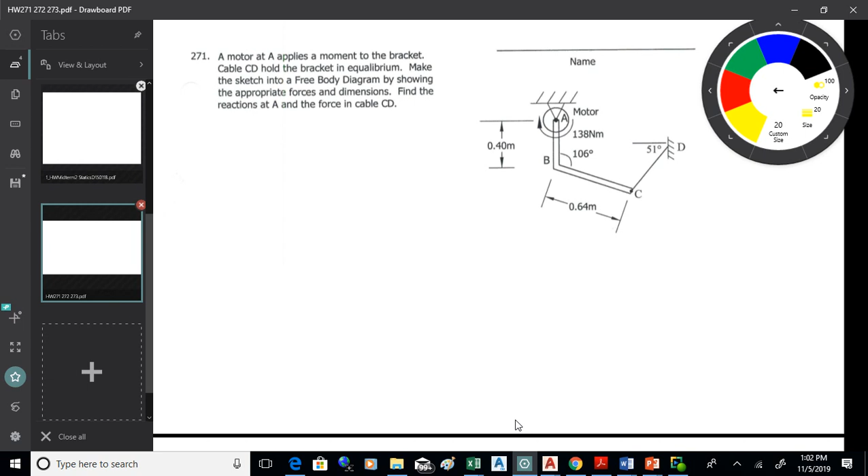Also there's a new version of 271, 2, and 3, if you have the newer book, which I think says 2019. It doesn't look too good, does it? I guess we better get that down.

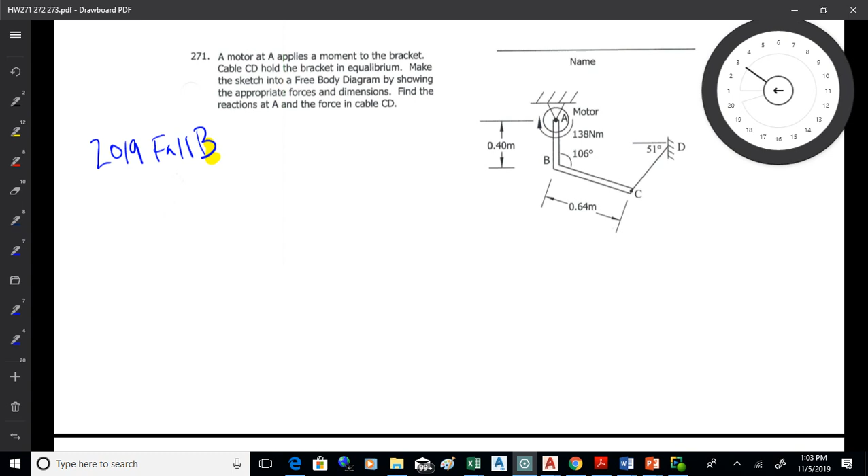All right, so your book should say, I think it's 2019 fall, with a B after it. That has the correct problems in it. If it doesn't, you either need to get a copy here in class, which I handed out, or go on Moodle, where I've got them posted.

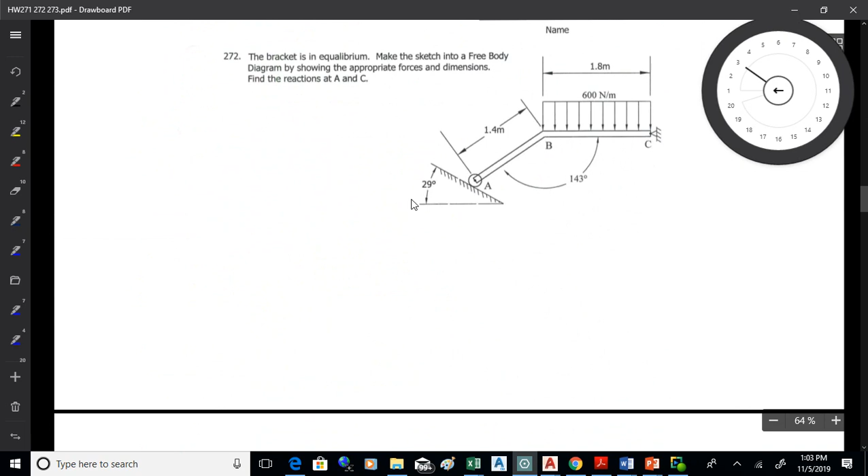And so 271 should look like this. The first 3 are based on coming up with a free body diagram using trigonometry and getting the thing broken down so you can take moments about a pin joint, I think is how the first 3 of them work. Now I'd be happy to go through any of the first 3 you'd like me to. There's the first one, there's the second one, and then the third one looks like that. They all use the same approach, although they're all, of course, different types of problems.

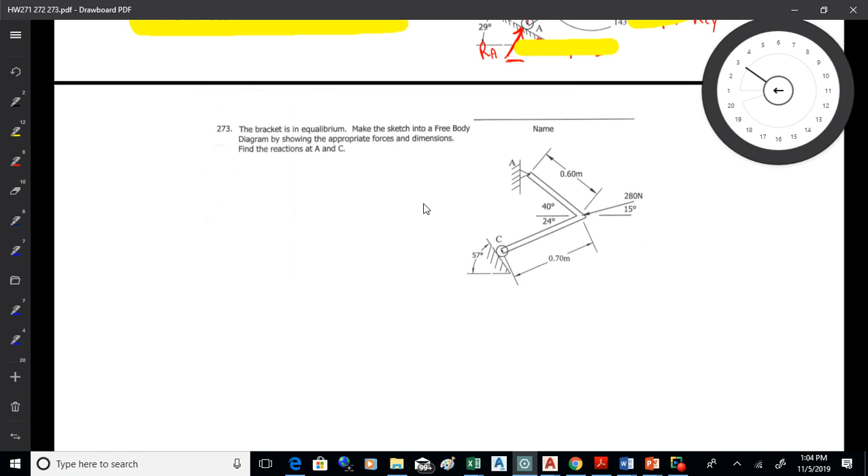Are there any questions on any of those in particular you'd like to go through, or one you'd like to look at? It might be worth a while to go through at least one of them just to get the approach down. You want to go through the second one? Okay, sure, we'll do that. All right, here's the second one.

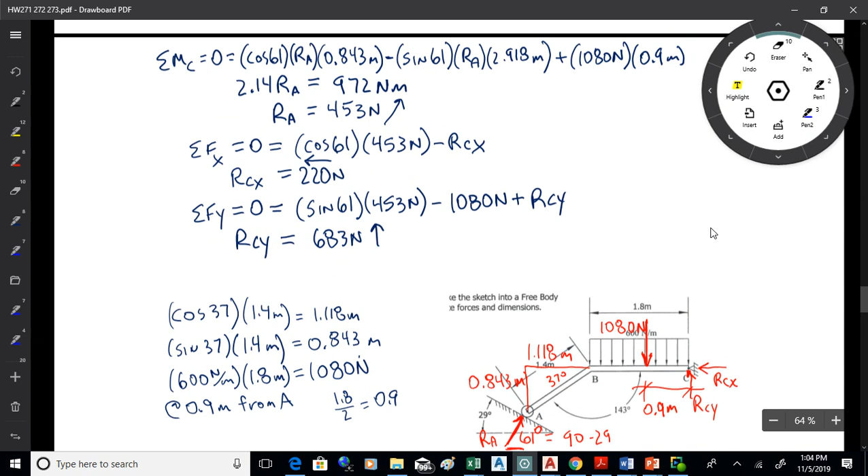All right, so the deal with these types of problems goes like this. What you want to do first is actually the stuff at the bottom. So I'm going to look at that thing and say, okay, I need a free body diagram of that. And then I'm going to look at where the forces are applied. The forces are applied at the pin joint right there, of course in this distributed load, and then there's a force right there. Okay, that's where the forces are applied. So that's step 1.

Step 2 is to say I've got a pin joint at C. So probably the way I'm going to start this problem is by going sum of moments about C equals 0. That's how I'm going to start that thing. And the reason is there's 2 unknowns there. In a 2D statics problem, you can only have 3 unknowns and be able to solve it. So if there's 2 unknowns at the pin joint, there can only be 1 other unknown on the object. And by taking a moment about C, I'll eliminate the 2 at the pin joint. I can solve for the 3rd. So that's my thought process.

Now, if I'm going to take moments about C, what I want to do is join C to every one of the forces that are applied with X and Y dimensions. That's what I want, because then I can come up with a moment equation pretty readily. Okay, so that's kind of what I'm thinking about when I start looking at this problem. So we good with that so far? We got any questions as to the approach or anything like that?

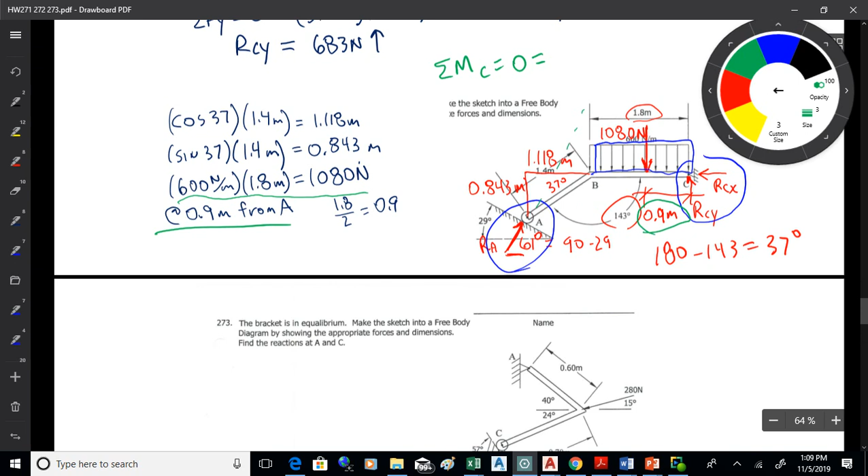What's happening here is I've taken that angled bracket and changed it into X and Y's. As long as that's a solid, rigid object, how I get from C to A doesn't matter. What matters is the position of A and how it relates to C with X and Y dimensions. As long as it's a solid, rigid object, the nature of the connection doesn't matter—this object could do anything in between for all I care. All that matters is where A is and where C is.

I really want to get that point across because I do these things on AutoCAD, and my sketching ability is a little crude. But open up a statics book and you'll see all different pictures—landing gears from aircraft, artificial limbs, hydraulic cylinders, wheelbarrows, you name it. It doesn't matter; it can be anything. What matters is where the forces are applied and how you connect them together. So get over the sketch—just turn it into a dimensioned force diagram with the origin at the point you're going to take moments about.

So when you have a 1080 Newton at 0.9... is that from B or A? I mean, C or A? It's from C. It's from C. Did I bust that? Yep, I busted that. Thank you, yeah, it's from C. Other questions? Okay.

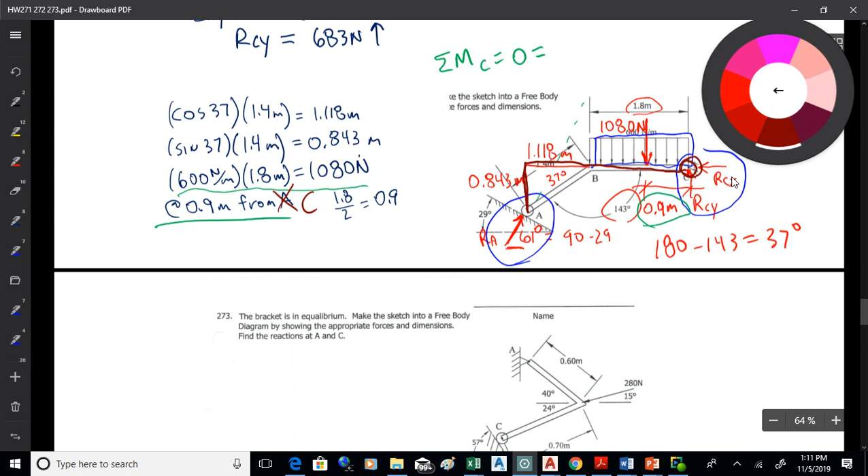Okay, that's just a matter of generating equations.

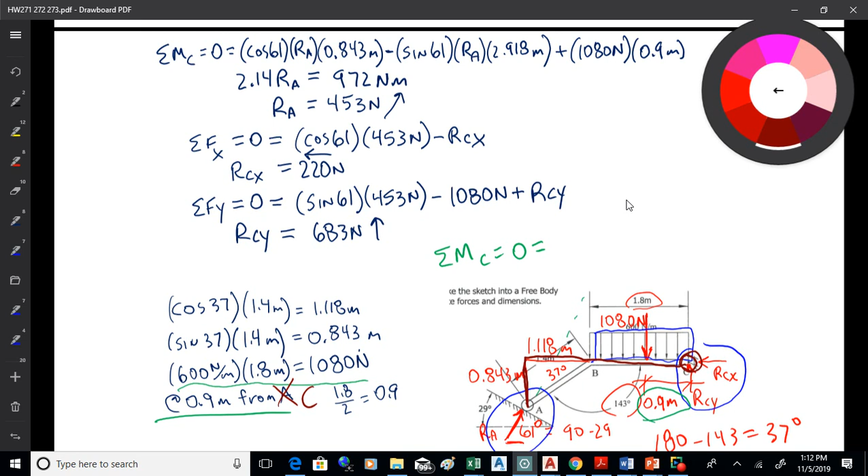So what you're going to do is start at C and go to where the forces are applied, using X moment arms with Y forces and Y moment arms with X forces. So we go cosine 61 times RA—that gets the X force at A, since cosine gives the adjacent side to that 61-degree angle. Then you want a Y moment arm, 0.843. That's all set up and ready to go. That's going to undercut under C and come around, so that's positive.

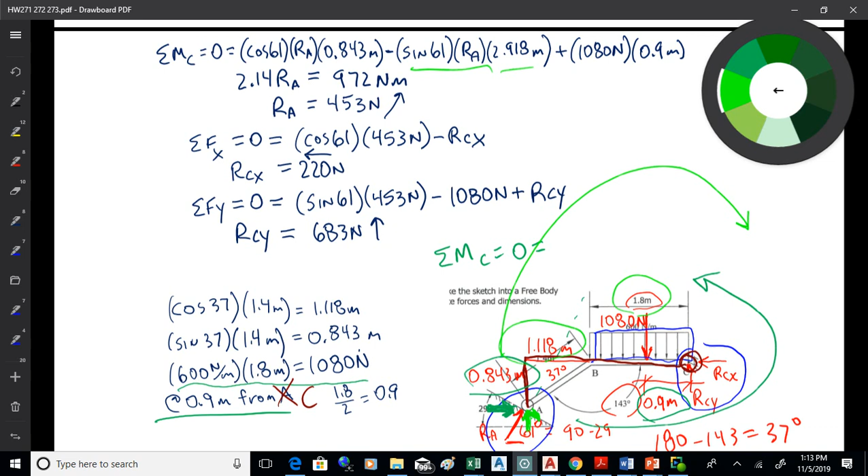Then we've got sine 61 times RA—that's the Y component, which goes with an X moment arm of 1.8 plus 1.118, so 2.918 meters. That comes around clockwise, so it gets a negative sign. And then the last one is 1080 times 0.9, which comes around counterclockwise, so that gets a positive sign.

We good? We good with that? Okay.

Now once you've got that set up, there'll probably be an intermediate step where you calculated each one of those individually and then worked it down to get to 2.14. RA is 972, so RA is 453 up and to the right. That's 61 degrees. Okay.

Now once you've done that first moment equation, you've got two unknowns left, but they're in the x and y directions, so no more moment equations. They're more complicated, more chance for error. So what I'm going to do next is sum of fx is 0, sum of fy is 0, and solve for RCx and RCy. So, got any questions on that?

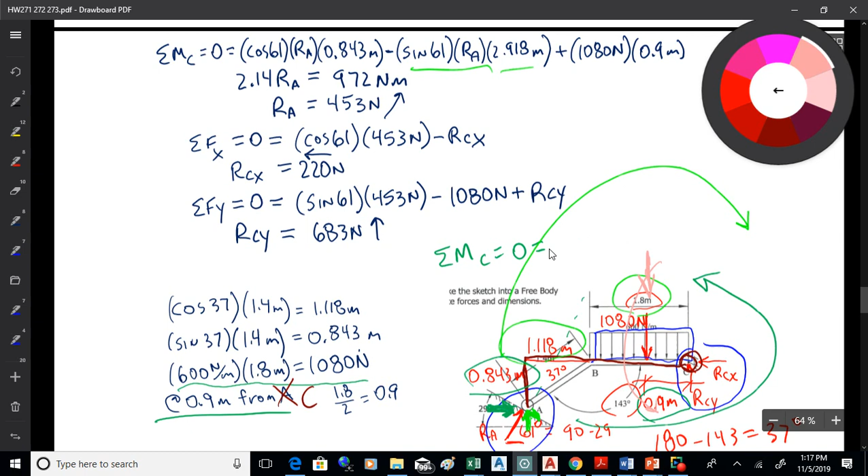So we got questions on that one? Okay. We're good. And that's kind of the blueprint for the first three right there. That's kind of the method. Okay. Good? Everybody got that? Okay.

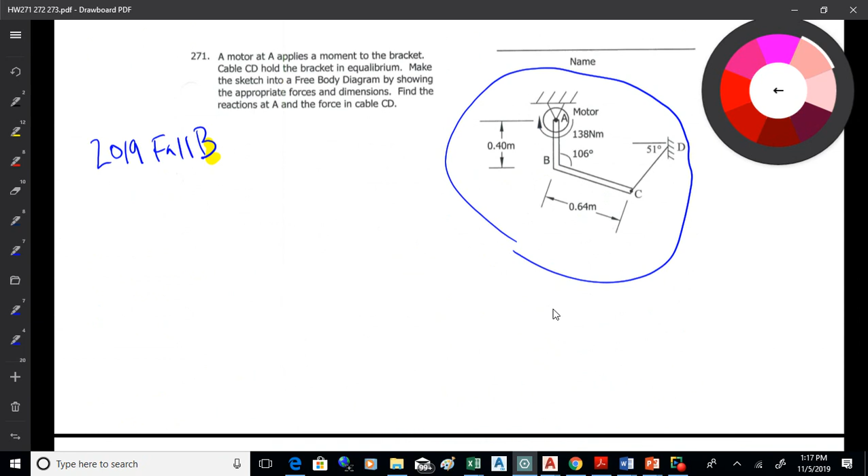All right, now the first one, you just have that couple up there. So what? You've got a motor up there at A. You're going to take moments about A, right? Because there's a pin joint there, and you're going to want to dimension that thing like that and like that, right? You're going to have this. That's what you're going to want to do with that, right? Are we good with that?

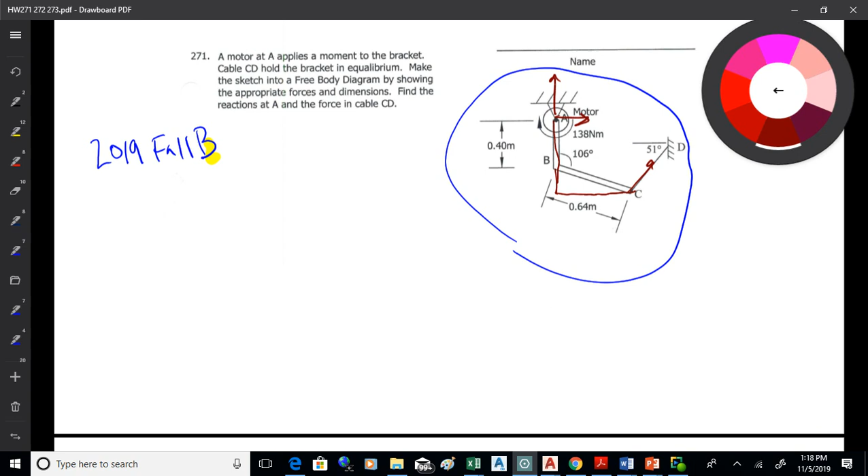So you're going to want to treat that. And then the last one. Is there anyone? We good? We good? Okay.

Now this last one is a little bit, it's got two angled pieces. That's okay, you just trig each one of them out. So you want to go like that, and then you want to do the same thing over here. So your goal here, your finished product that you want to work with so you can get a good free body diagram, is to get this thing kind of worked out, where you've got one thing like that with an X and Y dimension to that point, and then the other one you're going to want is another set of dimensions like this to get to that point, right?

So you want X and Y dimensions that go from the point about which you're taking moments, which in this case is A, to the points where the loads are applied. B and C, I think. Yeah. All right.

So we got 40 degrees. Now, how long is that first armature coming from A to B? I've got that thing kind of muddied up. 0.6. So what's cosine 40 times 0.6?

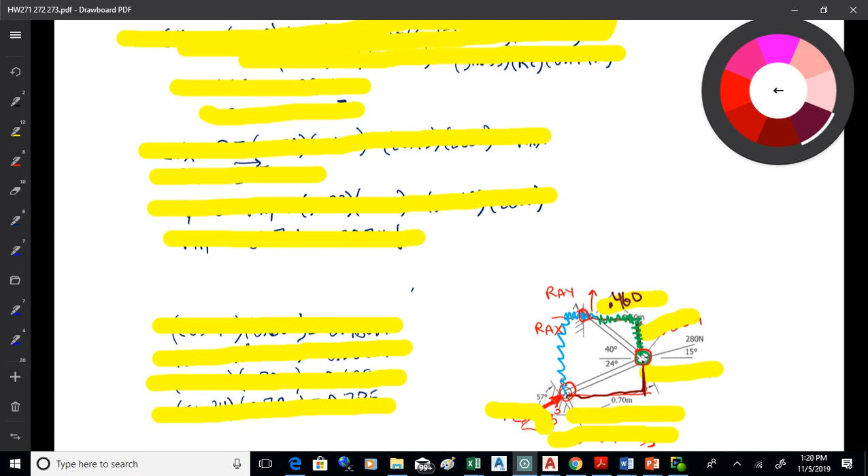Yeah, so 0.460, I guess we could call it near enough. Okay, so that's 0.460. And then you're going to have sine 40 times 0.6, which is 0.386.

And then you're going to go sum of moments. Eventually you're going to be sum of moments about A equal to 0, and then that's going to be what? So that's going to be sine 15.

So here's my thought process on that. Sine 15 times 280, that'll get me the Y component. That's going to go down. That's a Y force. I want an X moment arm with that. They're newtons, right?

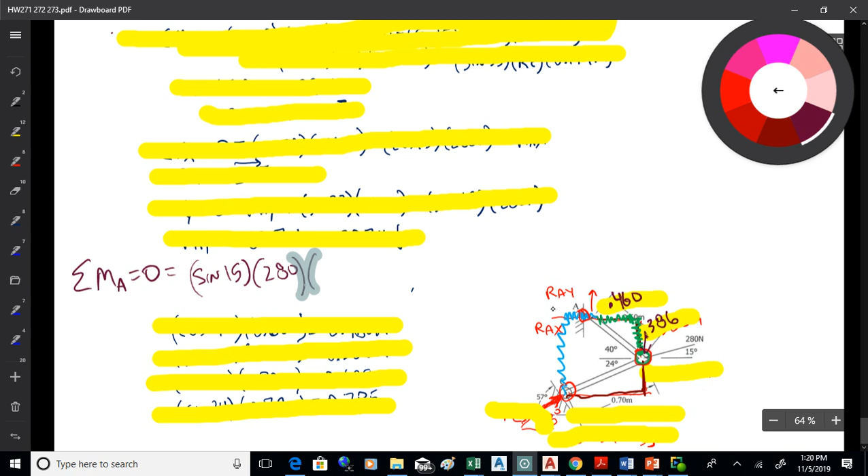And that's going to be 0.46 meters. Okay, then I look at that. If that pushes down, that's going to go clockwise. So that's going to get a negative, right?

I put the numbers in the parentheses, then I look at the direction. I don't put any signs in the parentheses. That just muddies things. Just put the numbers in there, then I look at the sign after I've done it.

And then I'm going to have what? Cosine 15, 280, 0.386, right?

That's going to go around clockwise too, isn't it? So those are both negatives, aren't they? Okay, and then you're going to have a couple other of these things.

For RC, you're going to have some trig in there, and you're going to have some trig and another set of moment arms. Okay, so that's what that moment equation will look like.

Any questions on that? All right, so that's how I'd start that one off. Okay, now we got, so we good on those first three? We got any questions regarding them? Doing all right, okay.

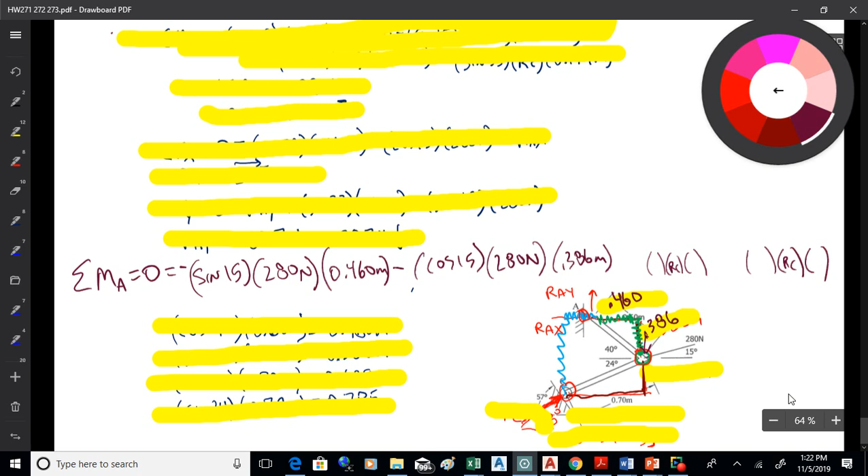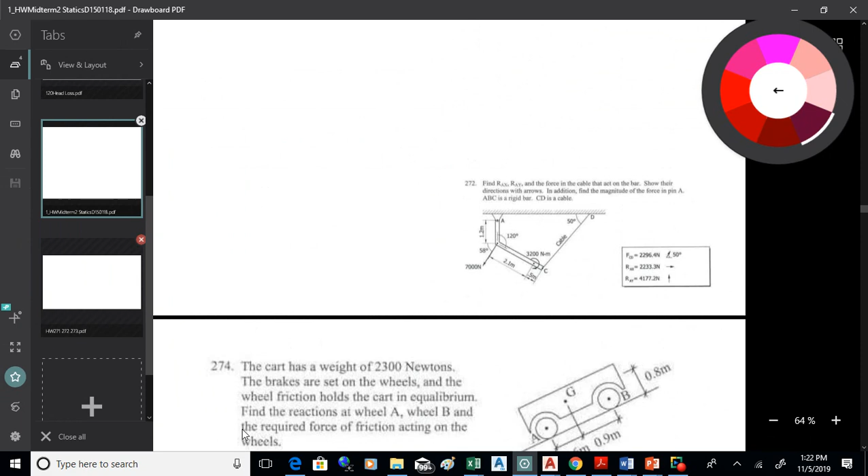All right, let's have a look at the other three then. The other three are a little, they involve some more complex things, little different situations, you might say. So let's have a look at those. They all kind of have their little things about them to be able to figure out. They are similar in that you always start with a free body diagram and you want to get that thing dimensioned and all that so you can work with it properly. So let's have a look at that.

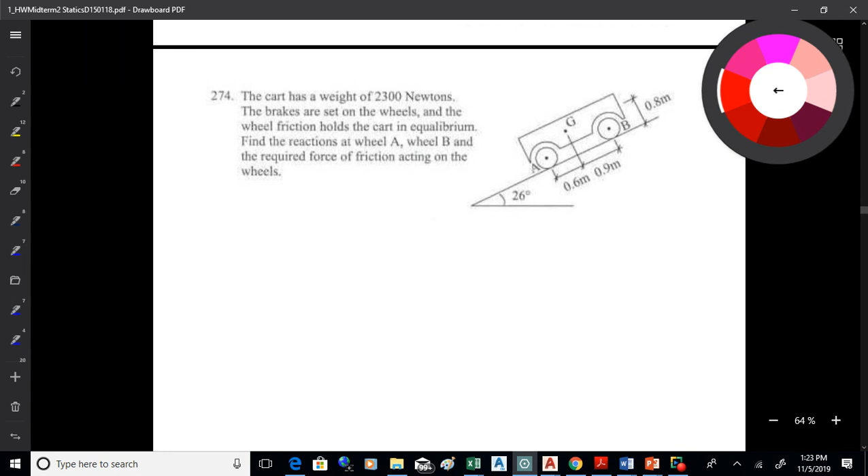Okay, so these things always start with a good free body diagram. That's always what you want to do with these. Okay, so what do we got?

We've got the weight. Now the weight always acts down. So this is 274. And it doesn't matter which version of the book you've got. This one's fine, okay?

In both versions, it's the same problem. Okay, so you're going to have that weight going down from the center of gravity, so that's going to go down like that. And that's going to be 2,300 newtons. Okay.

Now you've got some friction going on here. We got brakes, so we're going to have the friction, right? That's going to hold that thing up.

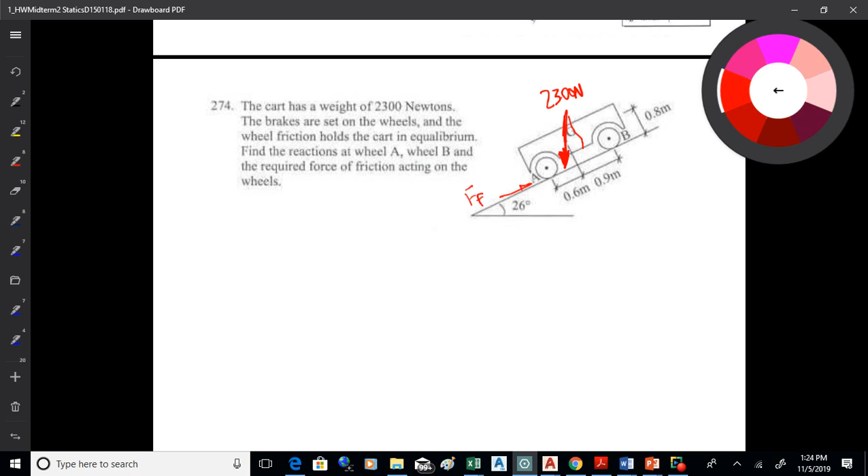And then you're going to have forces. Now those wheels are rollers, is what they are. We show the friction as one force acting there. I'll just leave it as one force, so I could do that.

Then the forces on the wheels are going to be normal, aren't they? Okay, so I'll have those two forces. I'll call that RA and RB. So I'm going to start that thing off like that.

We doing all right with that? We got any questions on that so far? So that's what that thing's going to look like.

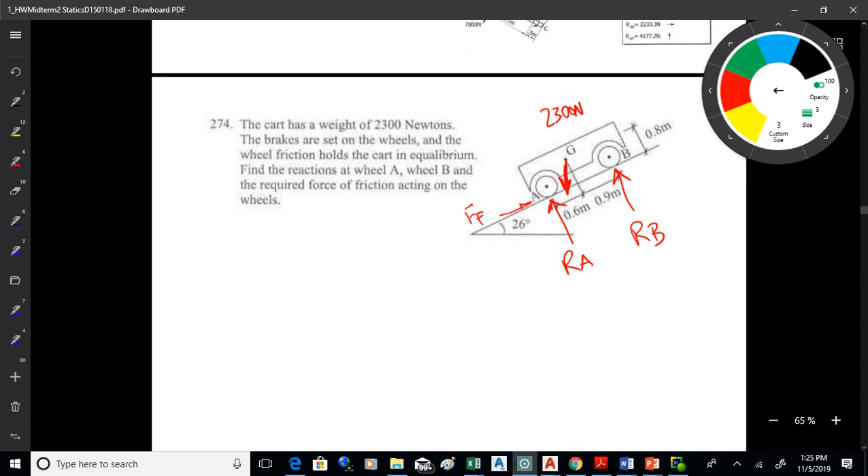Now when I look at that, what I'm doing there, I'm seeing four forces. Three of them are oriented to the ramp, aren't they? So when I see that, what comes to my mind is it's going to be to my advantage to work this problem out with an inclined axis system.

So I'm definitely going to do this one like that. Okay. So when you do that, the only thing you really have to deal with as far as trigonometry here is the weight. Okay. Now, the ramp is at 26 degrees, so that force will also be at 26 degrees in there.

There's different ways you can prove that out, but that weight will go down at 26 degrees also. Now, there's one little thing on this that you got to concern yourself with, and this is I've kind of seen the errors people make with this, and I've made a few of them myself too.

What we got, everyone always picks this component of that force up. Now that's the adjacent component, isn't it? So that's going to be cosine 26 times the weight, times the 2,300.

But people often forget that there's also one up there. So remember to pick that one up too. That's going to cause a moment as well, that one up top, okay? And that's going to be based on sine 26 times the weight. So you got to pick both of those up, okay?

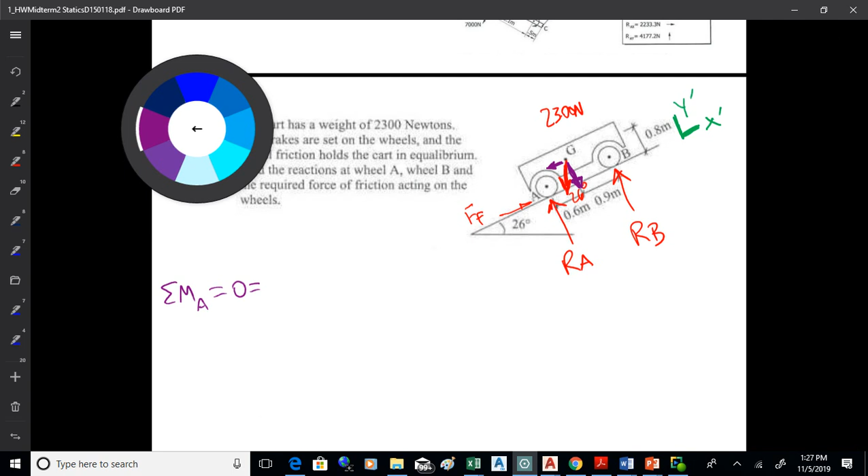So what are you going to have there? You're going to have cosine 26 times 2,300 newtons. And then you see you've got the dimension right there, don't you? 0.6 meters. I'm going to do that.

Is that going to be a plus or a minus? I think that's going to be a minus. You're going to have two other terms in there, and they have RB, and of course that's the whole point of the exercise, is to figure that one out. You're going to have another term in there too, and you're going to work through that, and you're going to get RB is 289 newtons. That's what you'll get with that.

Where the tire needs to... that's probably worth saying. It's not at the axle, it's right there, because that's where the friction's at. So I take it at the bottom of the wheel. We'll call that point A. And then once you've got that, keep it simple.

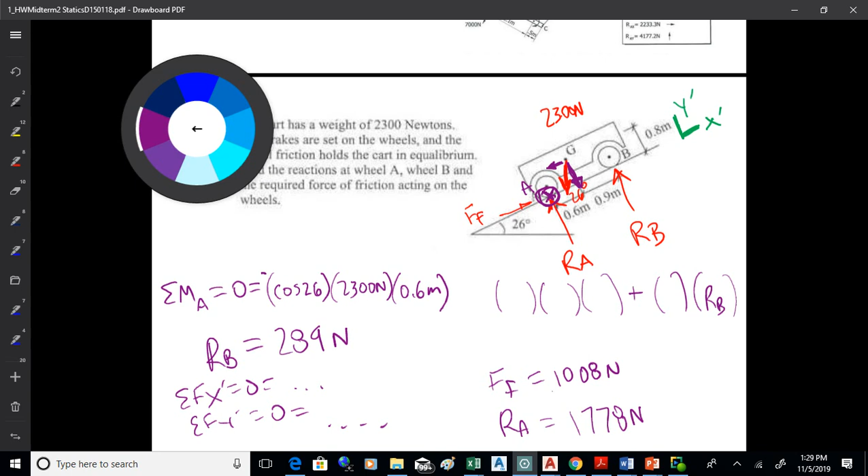If you're nervous, just double all your answers, right? Make everything twice as big. I don't know, I'm being a little facetious there, but there is that kind of aspect to it.

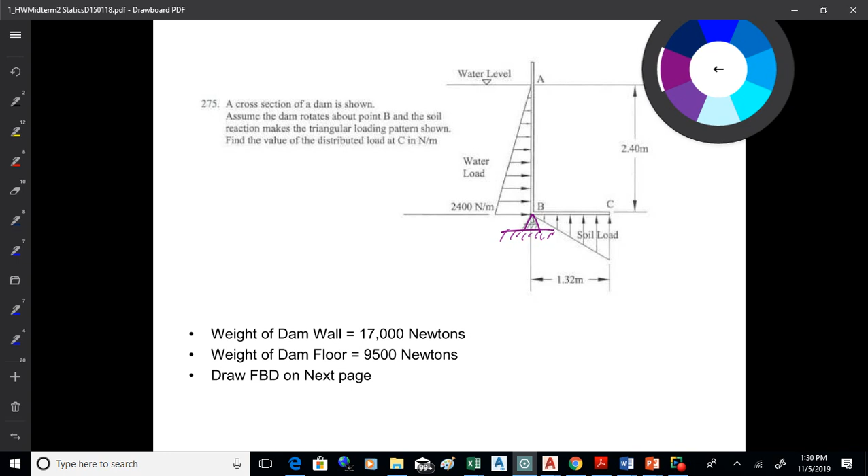So what you need to do is get that free body diagram going, right? You always want to do that. So what do we got here? We're going to have a pin joint there, and I show that. So what you're going to have from that pin joint is RBX and RBY. So there's two unknowns.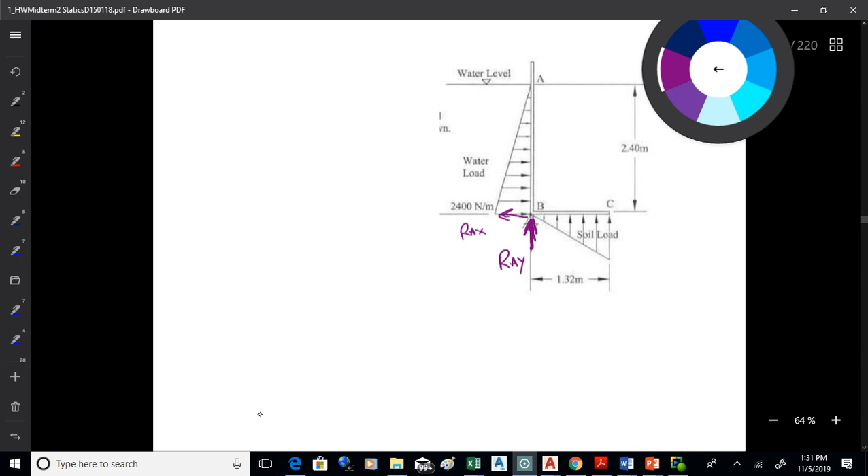Now the last unknown is what I'll just call R, and that's the reaction on account of the soil. The soil is going to push back on that floor of the dam and keep it from tipping over, that X right there. So you're going to have R right there. So there are the unknowns on the free body diagram.

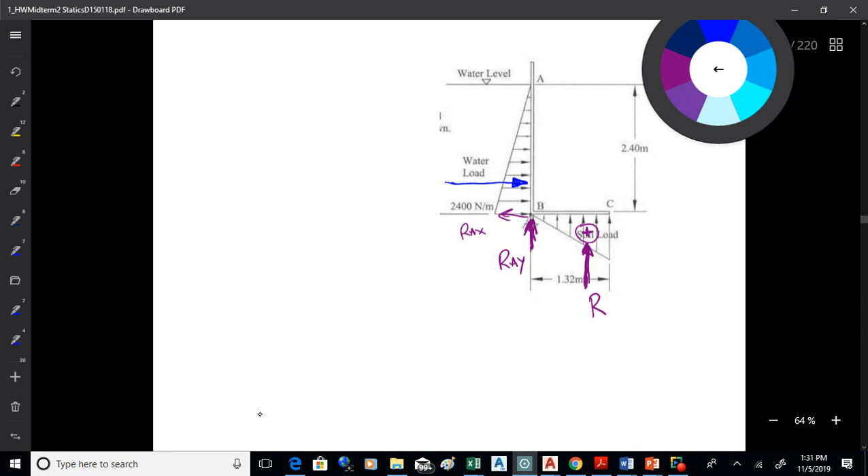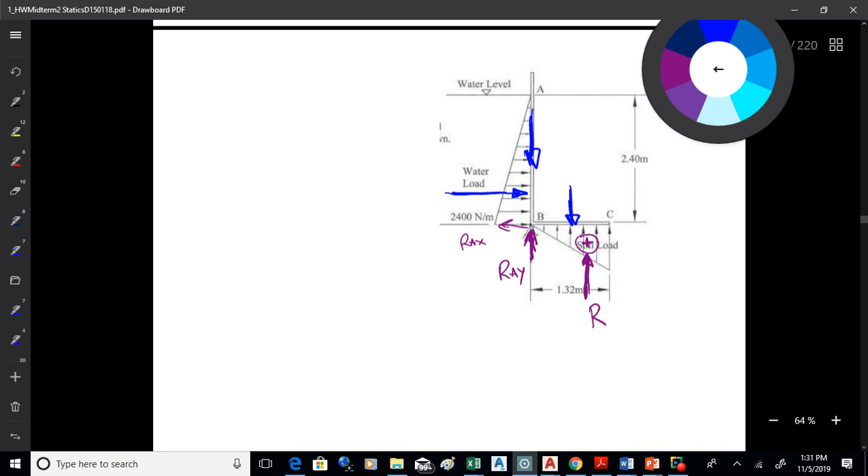Now you're going to have forces acting on this thing. We've got the force, the weight of the wall and the weight of the floor, and then you also have the water load. So you're going to figure those things out. This is 17,000 here, you're given the weight of the dam wall, and then you're also given the weight of the floor, 9,500. And then you're going to have to figure out that water load.

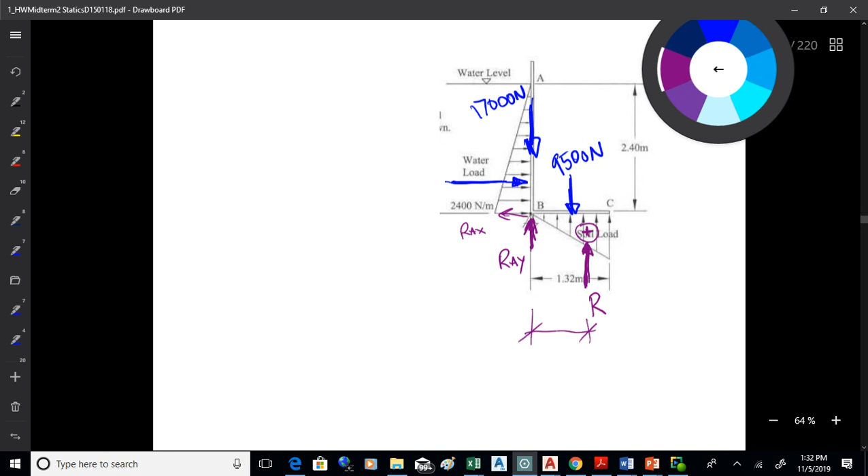Now you're going to want dimensions here. There's quite a few of them, so you just want to kind of keep all this stuff straight. That reaction is going to be what? At the centroid, that's going to be 2/3 of the distance out from point B, right? So 2/3 of the floor distance out, because that's a right triangle for that load, and you're going to the centroid of it. That's 2/3 of 1.32, and I'm pretty sure that's 0.88 meters out. This other dimension is not, this other dimension is less than 0.88 meters. You're going to need to figure that one out right there, okay?

And then you're going to need to get this one too. Again, right triangle there. You're 1/3 of the way up to 2.4, so I think that ought to be something on the order of about 0.8, right? So that's 2.4 over 3. That'll be that one, okay?

So I always do these intermediate steps. I'm just not smart enough to juggle all that stuff in my mind while I'm doing a moment equation. I work it out first, then I can do the moment equation. Okay, that's how I look at it.

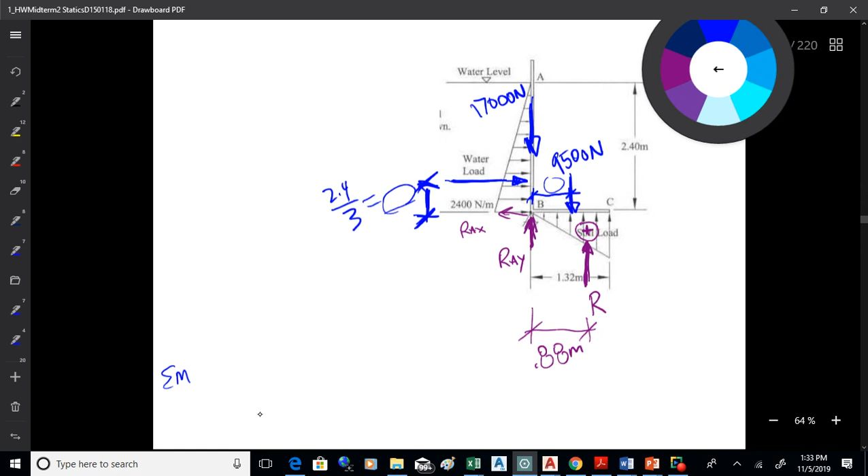Okay, and then once I've got that, I'll go sum of M, B, or A. Is that A? Oh, that's B there. Did I screw that up? I guess I did. Where's A? Oh, A's up top. Okay, so I got my, that should be a B right there, and that should be a B right there. Sorry.

Okay, so sum of moments about B, set that equal to 0, and then off you go. You're just going to start working through that. You're going to get the 0.88 R, that'll be part of what you're going to do. 0.88 meters, and R, that's a moment, and that'll be positive. Then you're going to have minus the 9,500 newtons times its moment arm, and then minus, because it's clockwise, right? The force of the water times 0.8 meters, right? So you're going to get all that in there,

and you're going to solve for R. Now what R comes out to be is 9,743 newtons. Okay, now what we want to know is the height, that pressure at the end.

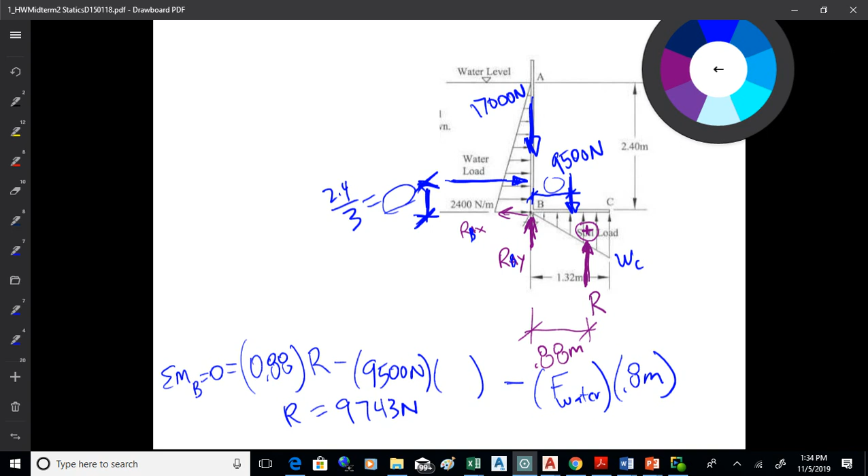And well, actually it's not quite a pressure, it's an instantaneous load in newtons per meter. We want that, okay? So what we're going to know here when we work through this, in this method at least that I'm using, that I'm analyzing this with, is you've got a triangular load like that, and the area is equal to R, and I'm calling this distance here WC, the soil load at C, and then it's 1.32 meters wide, okay? So you can figure out what WC is because you know the area of a triangle is 1/2 WC times the base is going to equal R.

So you can solve for WC, okay? And that comes out to be 14,762 newtons. Because what we're asked is what's the load on the soil at the end, and the design load, the governing load is at the end because that's where it's biggest. So that's the one you're going to be concerned with because that's the largest one. So if that soil's actually going to fail, it's going to fail at the end of the dam. That's where it's going to fail. Okay?

And then you got to go sum of Fx and sum of Fy also on that one to figure that one out. So to finish that thing off, you go sum of Fx and sum of Fy. So with the sum of Fx, you're going to get Rbx is 2880. And then with sum of Fy, you'll get Rby is 16,757. Okay.

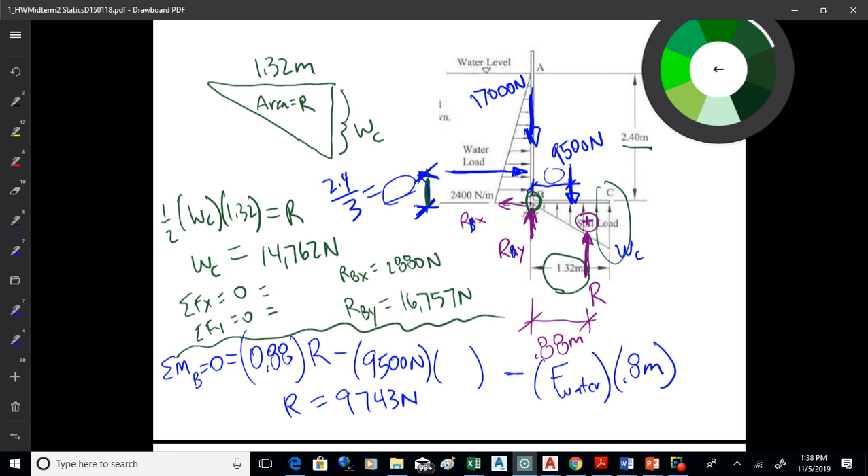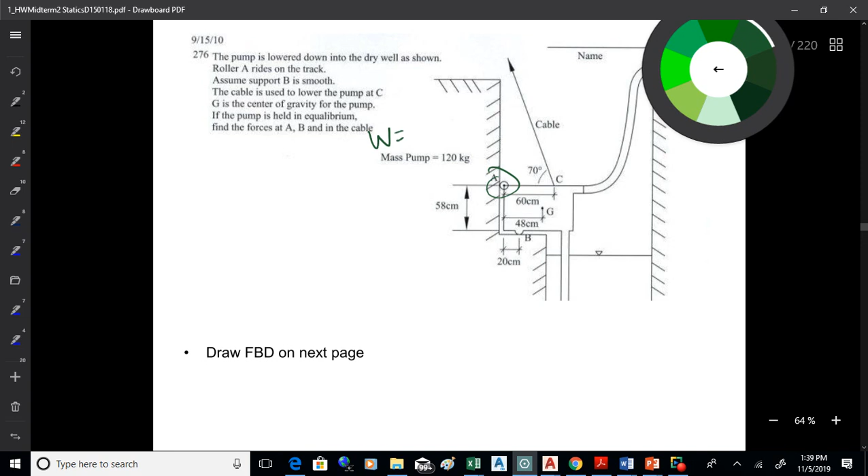So what we want to do is make a free body diagram out of this. You're given the mass of the pump is 120 kilograms, but remember, we don't do statics with mass, we do statics with weight. The weight associated with that will be 1177 newtons, that's just the mass times 9.81. Keep that in mind. The metric unit for mass is kilograms. The English system of units we use in this country, the mass unit is a slug. Kind of an odd unit, but it's a slug.

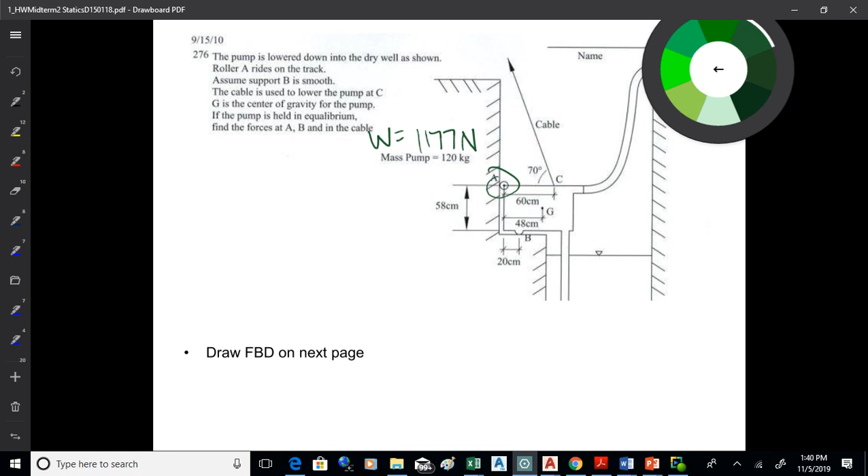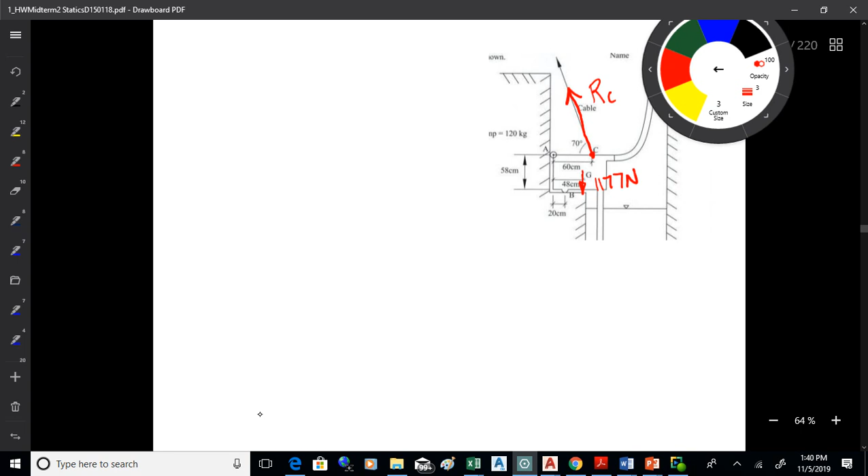So let's get a free body diagram going on this one. What we're going to have is the weight, and the weight acts at the center of gravity, and that's 1177 newtons. We've got this force for the cable, I'll just call that RC, a reaction at C, at a 70-degree angle. You've got a roller, so you're going to have RA. And then you're going to have that smooth support there with that little semicircle, so if that's smooth, you're going to have RB doing that. So there's the free body diagram.

So we good with that? All right.

One thing I've told you to do numerous times is to take a moment about a pin joint if you see one, but I don't see a pin joint on that one. So we have to go back a step. Why do we take moments about pin joints? What's the purpose in that? You want to eliminate two unknowns, right? That's your purpose in doing that. So now you got to figure out where to take moments on this thing such that you will eliminate two of the unknowns. There's a few different places you can do that, but you're going to have to think that through and say, where am I going to take moments about such that I'll eliminate two of the unknowns from the equation? That's the easy way to do it. Then you can just solve for the third unknown.

Now, the other thing is, if you like using matrices, and if you got a solver on your calculator, you can always just power through it and just generate 3 independent equations and plug it in and solve. You could always do that. But if you want to do it by hand and solve it quick, find a place you can take moments about that only leaves one unknown. Then come back with force equations. That's normally the general approach.

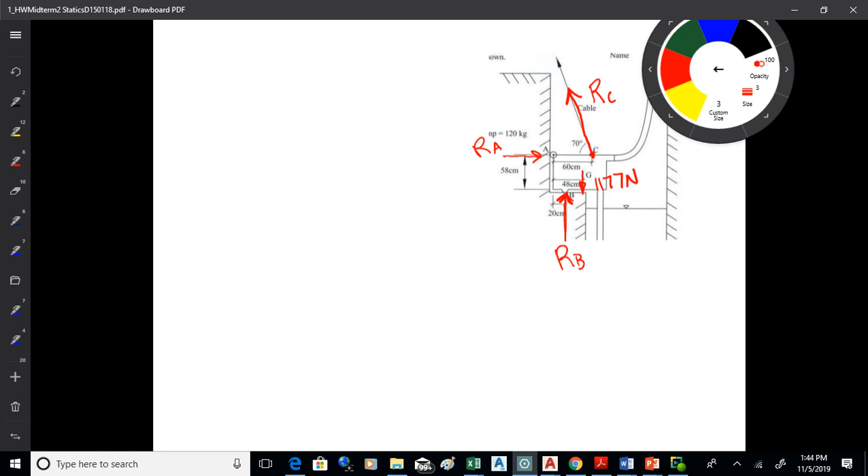I think they're on the previous page or something. They're 2 pages back, I think these are the answers for that one. Maybe 3 pages back, there they are. Yeah, so that's on page 15. I've got the answers to that one, right? Yeah, 276. Okay, so the answers to that are on page 15. And why don't I just write them down?

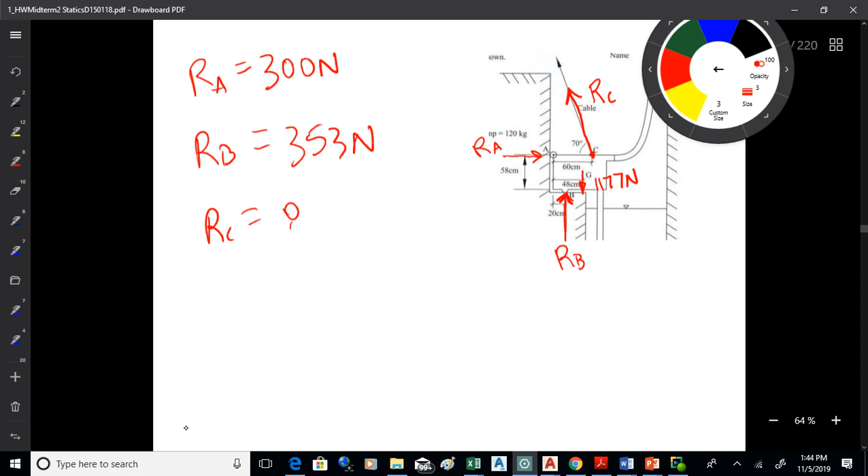It might be. So RA is 300 newtons. RB is 353 newtons. And RC is 877 newtons. Something like that. Okay. We're good? Okay. All right.